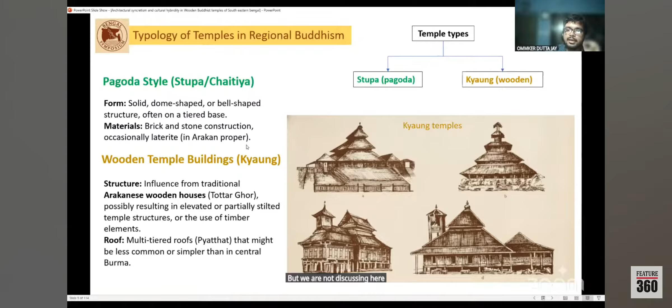If we discuss the typologies of the regional Buddhist temples, we see there are two types: one is stupa and one is kyaung, or the wooden temples. But we are not discussing the stupa here. In this paper, we discuss the wooden temples of that region.

For our case study, we conducted a metric survey, field and photographic survey of 6 temples, situated in Ramu, Cox's Bazar, and also in the Chittagong Hill Tracts, Kaptai. Unfortunately, most of the wooden temples in the Chittagong Hill Tracts are either destroyed or replaced by modernist materials like brick or concrete. Chitmorom Buddhist temple remains one of the sole surviving and well-preserved temple complexes of the Chittagong Hill Tracts, but the architectural influence remains the same as in Ramu and vicinity.

If we discuss the chronology, firstly we'll discuss the existing temple studies, their historical backdrop, their plans, sections, structural details, and motifs. Then we'll discuss the case study.

We have documented their historical backdrop, and we have documented and drawn their plans, sections, structural details, and motifs. We have also done some structural condition assessment and heritage impact assessment, and then we will compare them between these two through a comparative analysis.

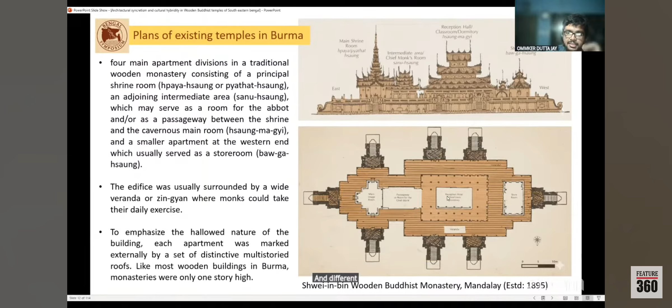If we discuss the plans of existing temples in Burma, we will see that they are elongated to the east and west side, and different spaces are signified by lofted or heightened roofs. This is the temple in Mandalay. We can see the main image room or shrine room in the east side and the storeroom in the west side, where the central spaces are colonnaded, and they are the reception area or main prayer halls, with an ambulatory path around them.

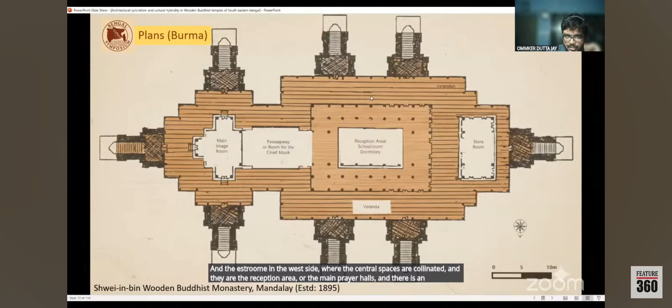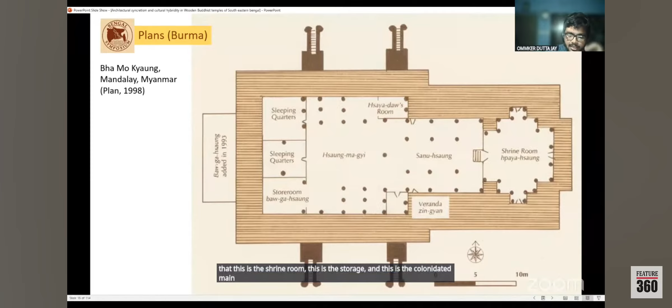This typology of plans is evident in most of the plans. You can see the shrine room, the storage, and the colonnaded main prayer hall. This is evident in most of the wooden temples in Mandalay. This is the rural temple, where this is the semi-outdoor space, this is the storage room, this is the shrine room, and this is the reception area. These are evident in most of the plans.

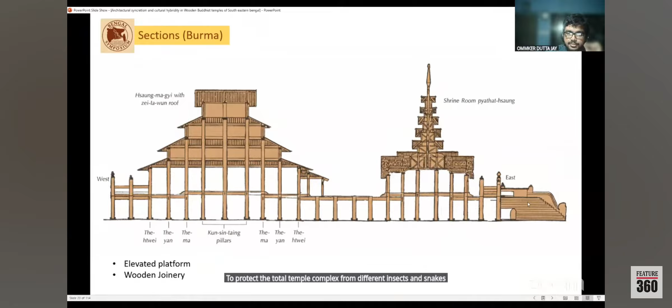This is the traditional section, and we can see the total temple complex is lifted up to a plinth of 6 to 7 feet high to protect the total temple complex from different insects and snakes. This is also evident in the temples of Bangladesh too.

Now we will show the plans and sectional documentations we have drawn and documented. This is the U Chit San Rakhain Buddhist Temple, Ramu, established in 1885. We can see the spatial pattern. If we go through the stair, we will get the entrance patio, which remains semi-outdoor space, or either it can also be an enclosed space.

Then there is the main prayer hall, then the asana where Buddha's statue is kept, and behind the asana there is the Vante's or priest's room. But previously there was an accessible corridor here, so that can be an ambulatory path. As the ancillary function, here is the storage which is kept.

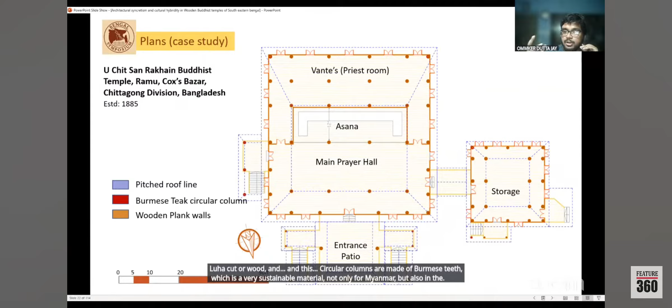The walls of the temples, even the floor beds, are made with loha cut or wood, and these circular columns are made of Burmese teak, which is a very sustainable material not only for Myanmar but also in the topography and region of Cox's Bazar and the Chittagong Hill Tracts.

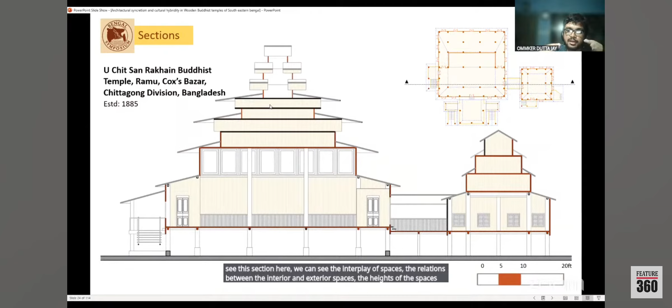These are the dimensional drawings or working drawings with dimensions and measurements. If we see the section here, we can see the interplay of spaces, the relations between interior and exterior spaces, the heights of the spaces, and how the roofs are structured. These are some pictures here: this is the main prayer hall, this is the storage, and these are the roofing structures. The roofs are made of corrugated iron.

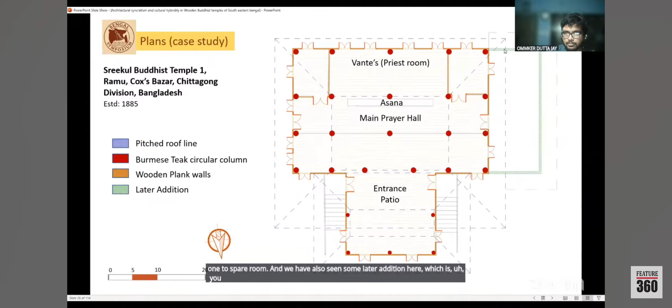Here is another study, the Sreekul Buddhist Temple 1. We can see the same spatial pattern: entrance patio, main prayer hall, asana, and the Vante's priest room. We have also seen some later additions here, which is, you can say, a clear violation to the heritage structures. Here are the dimensional drawings.

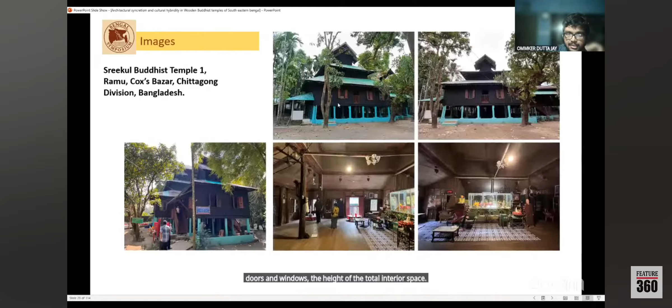This is the section where we can understand the volume of the interior spaces, the height of the doors and windows, and the height of the total interior space. And this is the external and internal pictures of the temple.

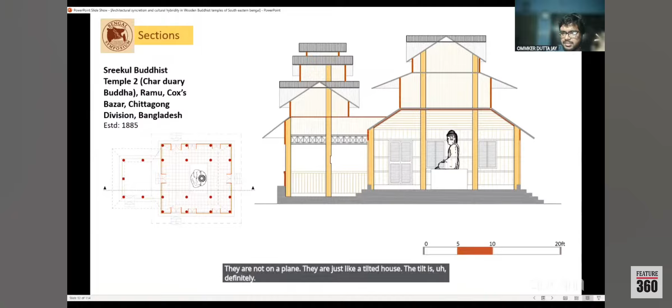Here is another temple where we can see the same space pattern. Here are the dimensions, and here are the sectional details. In this temple, we have found that they are not on a plinth; they are just like a stilted house. The stilt is definitely 1 feet 6 inches to 2 feet in height.

That is another temple, the Lamarpara Buddhist Temple. Here are basically two temples, and the most intrinsic feature is there is a bell tower, an octagonal bell tower here, and the bells came from Burma. We can see the same spatial pattern entering through the entrance patio, main prayer hall, and Vante's room.

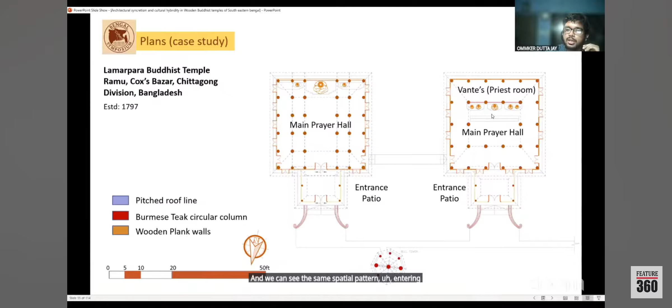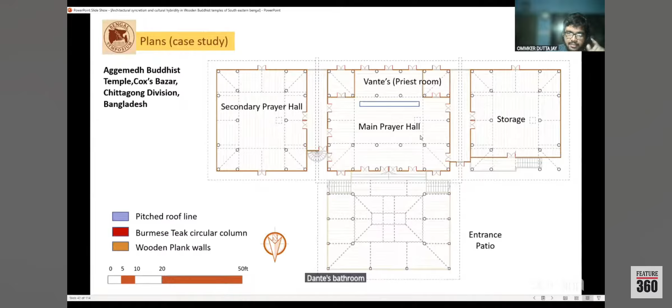This is the Aggemedh Buddhist temple, situated in Cox's Bazar. This is the complex, showing the entrance patio, main prayer hall, Vante's priest room, and the storage. There is a secondary prayer hall on the left flank, and the storage is on the right flank.

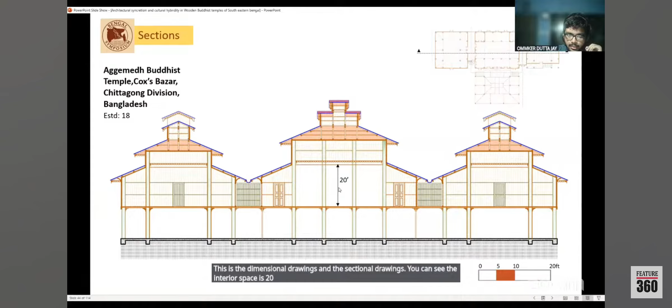This is the dimensional drawings and the sectional drawings. We can see the interior space is 20 feet tall from the plinth. And there are some pictures here presented.

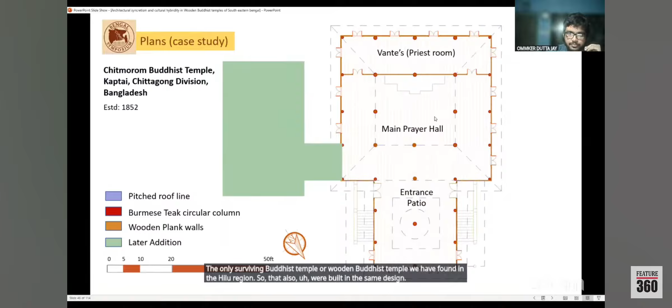Now, this is the temple complex we have derived from Kaptai, Chitmorom Buddhist temple, the only surviving wooden Buddhist temple we have found in the hilly region. That was also built in the same design, same main prayer hall, same spatial organization.

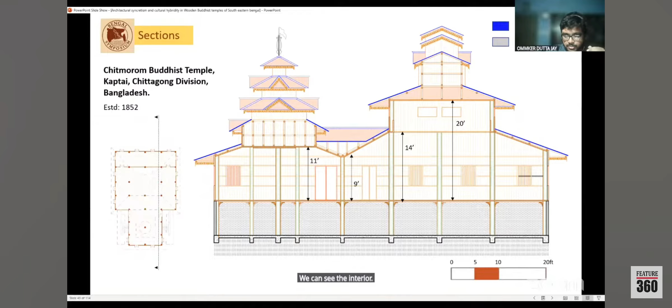Here are some structural drawings, sections with dimensions, and we can see the interior relationships between the spaces. Here are some pictures. So if we discuss the structural details, there are some myths that they are built with teaks.

The Burmese teak are the main column materials of these buildings. They are circular columns, and with every direction there are some legends and stories that each side brings positive energy or negative energy, etc.

But from an architectural perspective, we can see that these structures are supported on a good brick pile foundation. Although they are made of wood, their foundation is made of brick because that is an earthquake-prone region.

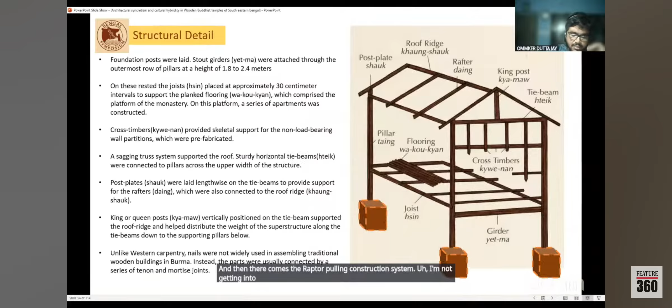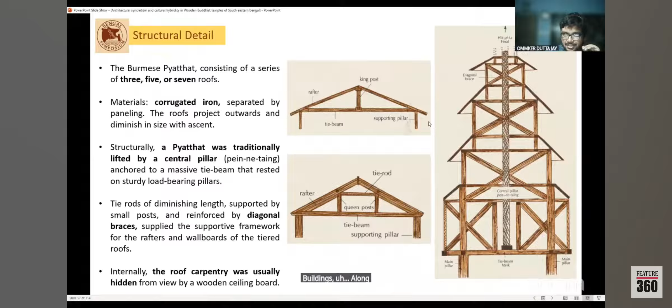And then there comes the rafter purlin construction system. I'm not getting into the details of the structural detail, but the tenon and mortise joinery is the most crucial joinery used in these buildings, along with the king posts, tie beams, and diagonal braces, which is also evident in the traditional architecture of Burma.

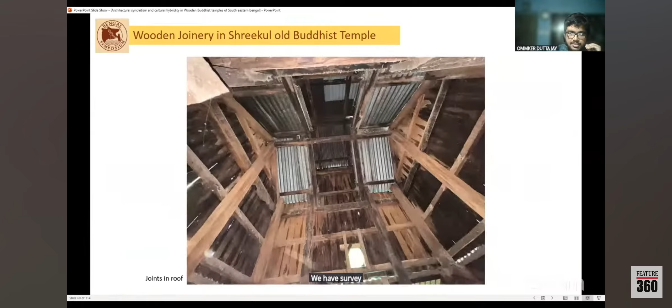So here are some construction details of tenon and mortise joinery we have surveyed from the photographic survey of our selected case studies.

Now, I want to say that these Burmese teak columns have a property: they prevent rust of the corrugated iron. The roof is made of corrugated iron, but the Burmese teak and its chemical inside prevents the corrugated iron from rusting. So there is a clear symbiosis between these materials, which have made the materials of this temple very sustainable, not only in Myanmar, but also in Bangladesh.

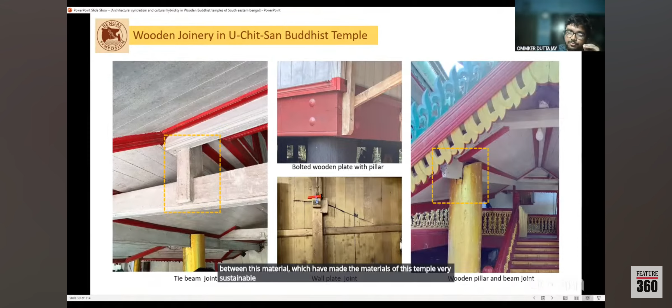So if we get to the roof typology section, these are the traditional roof types of Burmese architecture, and some of these are evident in the temples of Bangladesh also.

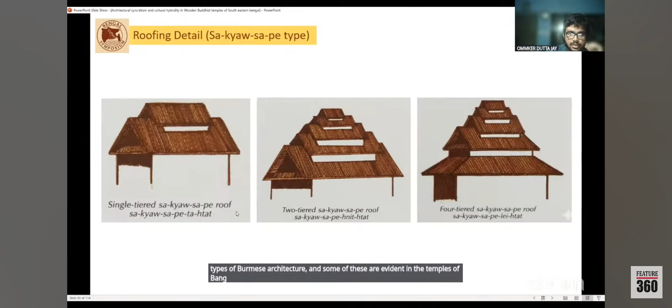Hello? Yes. Hello? Okay, these are the Sa-kyaw-sa-pe type temple.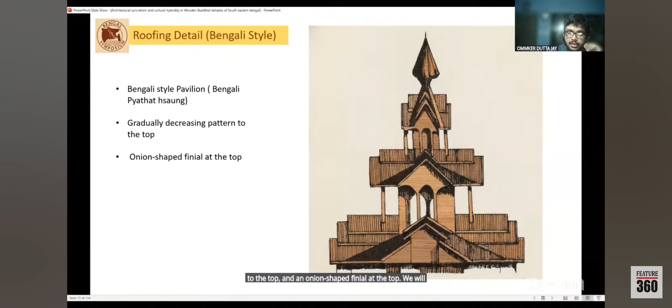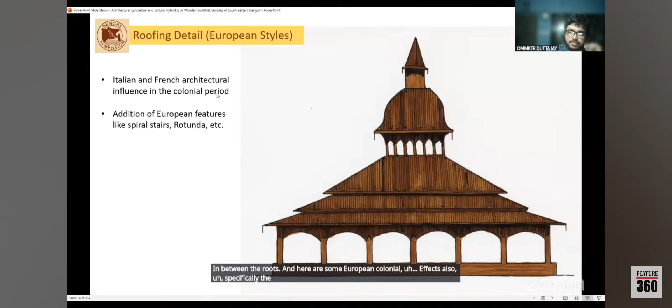And this is the Bengali style pavilion, which is pitched on both sides, and we can see the triangular punch in between the roofs. And here are some European colonial effects also, specifically the Italian and the French architectural influence, like spiral stairs and rotunda.

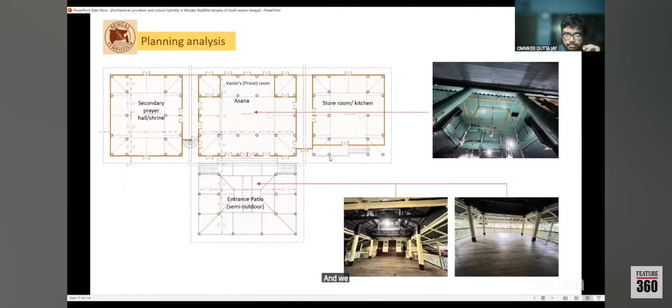So if we draw a comparative analysis, we have already discussed this spatial pattern earlier, and we have also shown the pictures in different positions inside the buildings. So from a 3D view, we can understand the roof plane, which is made of wood or loha cut or teak, that is called akkhaong in the local Rakhine language.

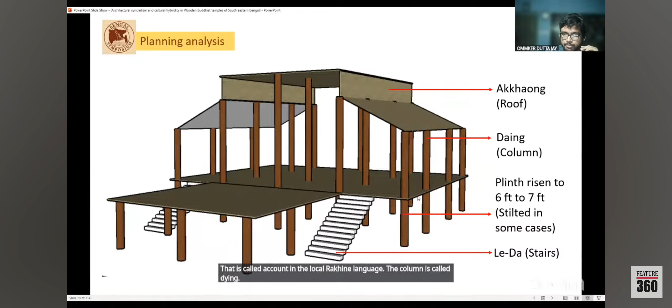The column is called daing, and the plinth is risen up to 6 to 7 feet, and the stairs are called le-da. The walls are called chongthare, and the floor planes are called chow-throng-brang.

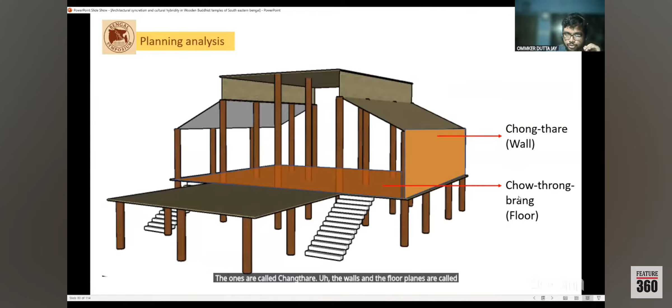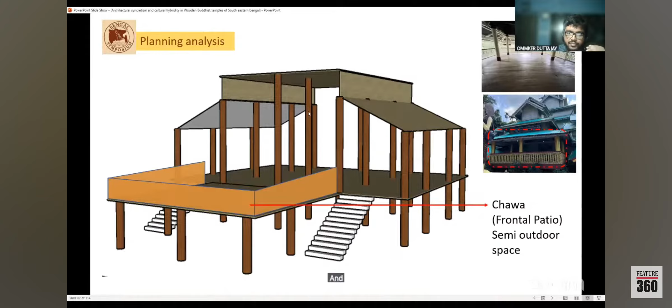And the total prayer space where the monks sit or where the worshippers sit is called chongtha, and the space in front of that can be either semi-outdoor or enclosed, which is called chawa. So that can be enclosed also. We can see the pictures in the upper right corner.

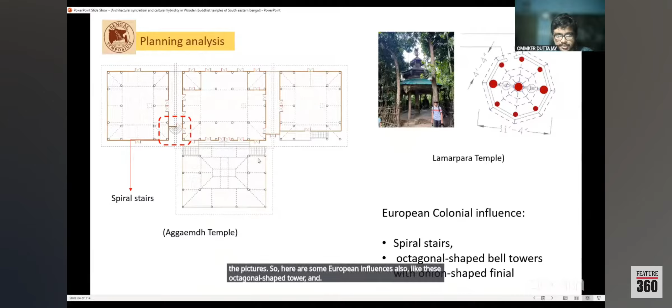So here are some European influences also, like this octagonal shaped tower and these spiral stairs. And what we have found is that the scale of the temples are relatively smaller than the complex temples in Burma or Mandalay, due to land shortages, since open flat land is scarce in the hill tracts, and land is also very costly in the Rakhine settlements.

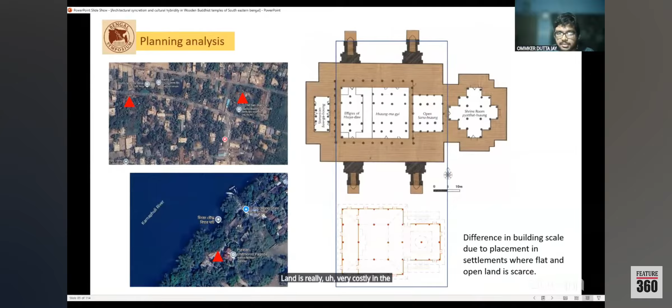So the scale comes a little bit shorter than the Mandalay temples. So here are the roofing detail analysis.

We have analyzed the similarities of roofing techniques and architectural features in the temples, like in the U Chit San temple where we see Hindu style roofing, Madras type roofing, and kon-pyathat type, hsaung type roofing.

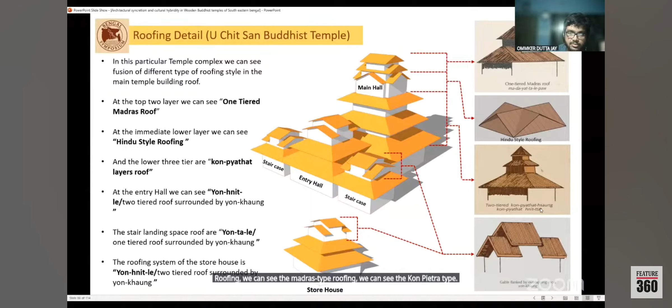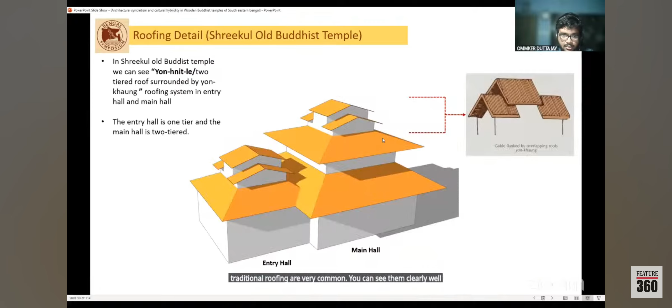And in the Shreekul Charduari temple, we can also see these types of traditional roofing are very common. You can see them clearly in the 3D structures. These gable shaped roofs are very common in the Shreekul Buddhist temples also.

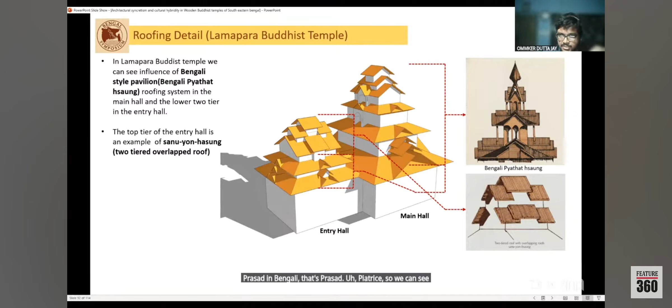And we can say this descending pattern is a Bengali style Pyathat roof. Pyathat means prasad in Bengali, Raj Prasad, Pyathat. So we can see this descending pattern very common in the Lamapara Buddhist temple.

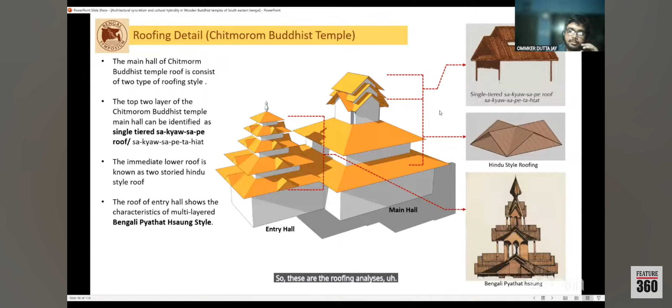So here are the pictures, and the same pattern replicates in the Agameta Buddhist temple also, and also in the Chitmorom Buddhist temple in Kaptai. So these are the roofing analyses. The traditional Burmese architecture has been clearly followed while designing these temples.

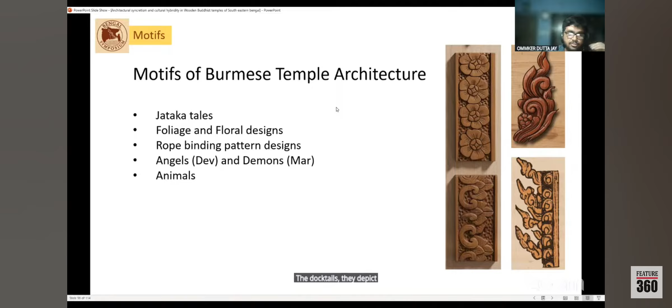So if we discuss the motifs in Burmese temple architecture, we see that they depict Jataka tales, Buddhist Jataka tales. They depict foliage and floral designs, rope binding pattern designs, angels and animals. These are the traditional designs of Buddhist temples in Burma.

So what we have found here is that traditionally there is no carving done in the roof. But like the frescoes in European styles, there has been some carvings in the roofs in the present times, in the present Bangladeshi wooden Buddhist temples in our case studies.

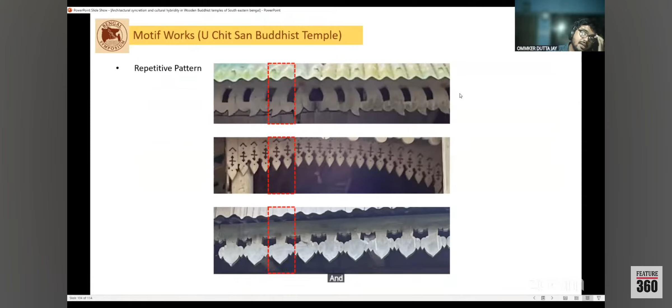And we have also seen the repetitive floral pattern or pendant pattern type designs in the edges of the roof. You can see them - there is a repetitive floral pattern.

And finally, we have done a heritage impact assessment based on their quality of workmanship, quality of design, representation of certain styles, their functional and orientation of the building, their skills of craftsmen and artisans, and their historic value and social value. We have also described their aesthetic value, architectural value, contextual value, and historical value.

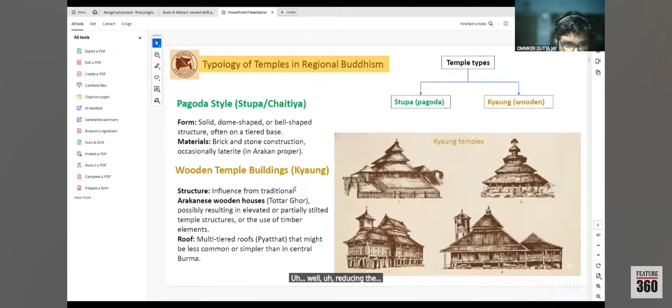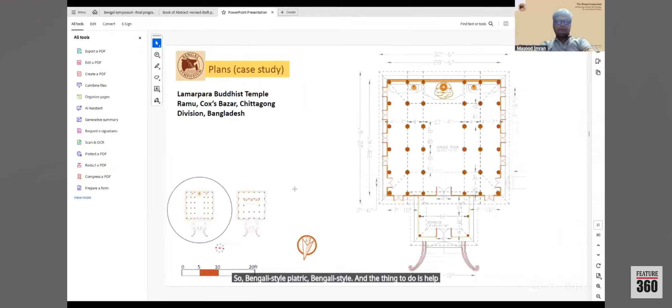Sir, in my slides I have shown the Bengali style pyathat, or Bengali style roofing technique. That is not seen in Burmese architecture, but is totally locally adapted. It is in the last slide where the roofing details were explained - the Bengali style pyathat, and the Hindu style pyathat. It is in the later phase.

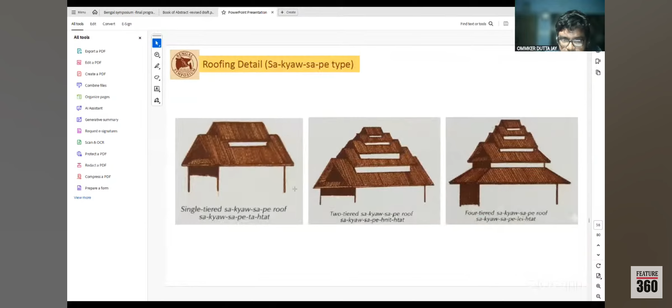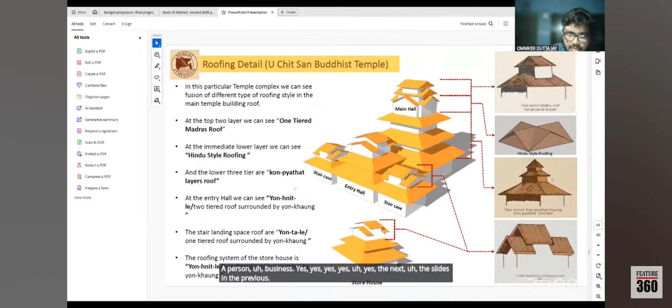Yeah, here it is, after a few slides. Please open the previous slides. Yeah, this is the Bengali style.

This is found in the Bengal provinces, and from our work we have found that these are not found in the Myanmar or Burmese region. So these are totally a stylistic depiction of Bengali style, but we can see the materials are the same - the corrugated iron, and also some features like descending order. These are syncretism between the Bengali style and the Burmese architectural spaces.

And also the Hindu styles - there is a lot of Indian architectural influence in this Burmese architecture as well.

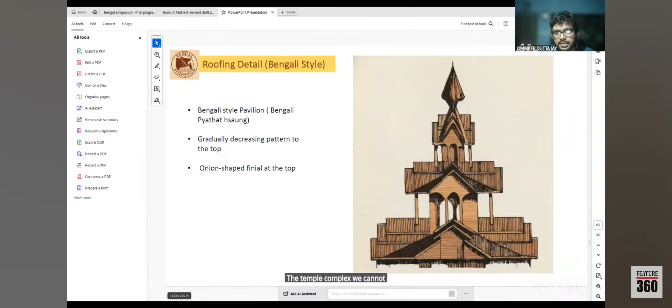The building scales are relatively smaller than the Burmese temple complexes. In Burma they built entire temple complexes which are very large, but in the Chittagong Hill Tracts, where land is short, we cannot call it a temple complex - we can say the unit is a little bit shorter. We also discussed the stilted typology: in Burmese temples the plinth is elevated 6 to 7 feet high, while in some temples in Bangladesh they are just stilted, elevated only 1 foot 6 inches high. So these are some features Bengalis have adapted from the Burmese ones.